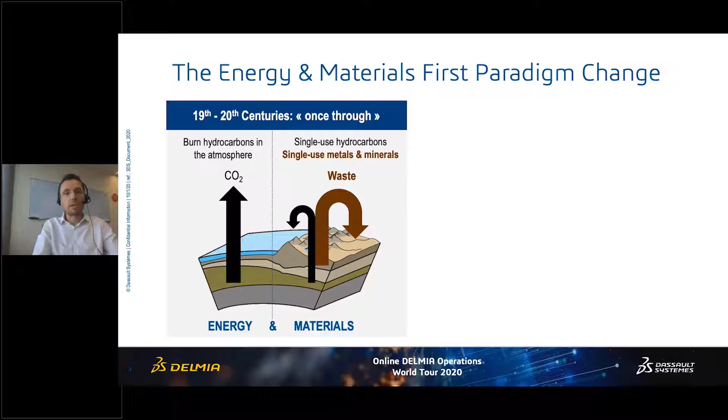And now we are heading towards something radically different, which means that decarbonization of the energy sector will rely on energy conversion devices that are manufactured primarily out of metals and minerals, which means that during this transition, decarbonizing the energy sector, we'll have to build more and more of those energy conversion devices, be it wind turbines, solar panels, nuclear power plants, or hydropower equipment and dams.

So this means that during a transition, which will last for this century, there will be an increasing need for metals and minerals just for the purpose of creating those energy generation devices. And on top of that, there is the continued demand of metals and minerals for the usage that was already existing. In order for this to become sustainable, we have to make sure that all this extraction of metals and minerals is not once through, but really becomes circular. So that's the major paradigm change.

Of course, within this circularity, there will be some losses, both for hydrocarbons and for metals and minerals, and we'll need to top this up with extraction, which will become minimal. So what does that mean for the metals industry? It means that the metals industry is going to transform towards a circular industry. That is a very important point.

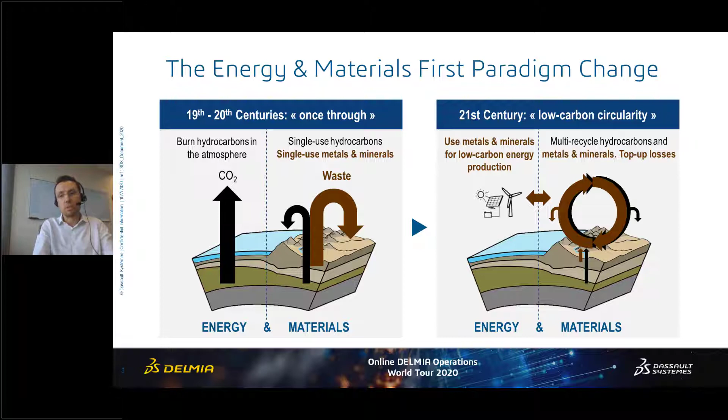The second paradigm change is that we've been in a commodity industry in energy and materials over the 19th and 20th century, and this is changing, and the industry is moving into productization. Productization of the end product, moving from bulk to specialty product, and also productization of the production infrastructure, moving from one-of-a-kind mega projects into replicable modular projects. That is another very important change.

So overall, what does that mean? We understand that there will be a very strong demand for metals, be it due to the continued growth of the population, continued growth of the world's average GDP. But beyond this continued strong demand, there will be a growth in scrap availability, scrap metal, many different types of metals, and I will go through some examples. And this means that this scrap metal availability, which is primarily going to be obsolete scrap, is going to start to fuel this circularity loop.

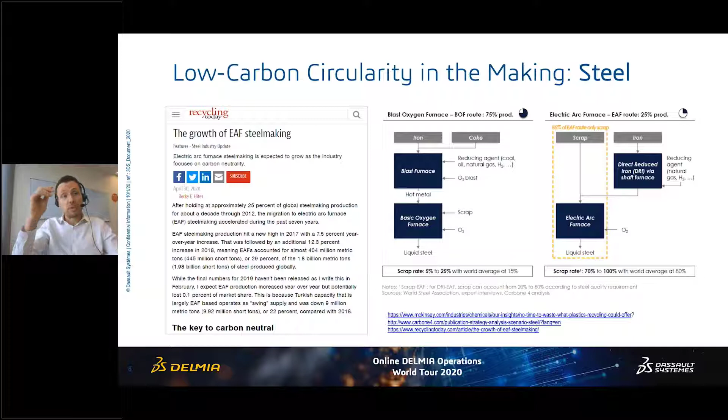In the steel industry, for example, there is a very strong growth in electric arc furnace steelmaking, which has very strong environmental advantages. And this is developing extremely quickly, in particular in Asia.

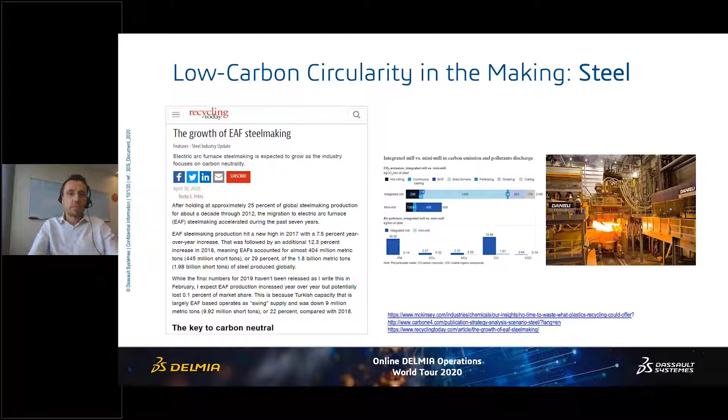Beyond traditional metallurgy, we also have the new kinds of metals, energy metals in particular. Lithium is an example. Everyone talks about lithium today. Everyone wonders about how sustainable lithium extraction and processing will be. Today, already, lithium circularity starts to be organized. There's a number of companies in the chemical and metallurgical world that are going in the direction of lithium recycling.

Why so? Very simply, because it's more economical to recycle lithium, particularly when it comes from electric vehicle batteries, because it is very much concentrated. Indeed, recycling metals from an electric vehicle battery is much easier than recycling them from smartwatch batteries. It's much more concentrated, and this is why major producers of electric vehicle batteries are today setting up their own lithium and other metals recycling plants.

And one of the high-profile announcements from Tesla is that they are commissioning their first recycling line in the Tesla Gigafactory. So not only do they produce new batteries from new materials, but they also start the circularity loop. This is very important because this is going to impact even more the manufacturing world.

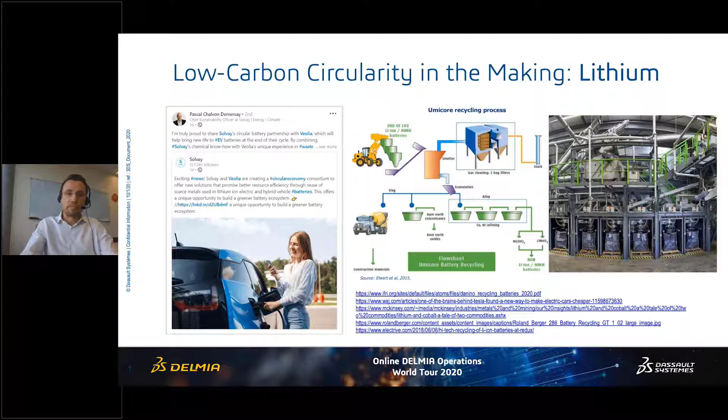So one of the first points to make sure that the metals industry goes towards better circularity is first better sourcing. Indeed, it is extremely important to ensure that there is traceability of the feedstock of whatever reaches the plants, and this becomes a reality today. A number of companies are positioning themselves in the field of end-to-end traceability. So traceability of raw materials, traceability of the processes that are used to transform them and to bring them to the metallurgical plant. So there has been a number of news recently around this.

And what is extremely important related to this topic is that it's not the topic of one specialist doing something specialized at one stage of the life cycle of the metals. It's really an end-to-end process that brings a number of different disciplines together. And this is really a topic where platforms can play a very important role. So here, I think this very first step is a critical one.

Beyond sourcing, which somehow is inbound, there are several other options that we have to discuss, and many of them are available today. So these options basically revolve around designing better products and also better processes. As I mentioned earlier, products are likely to become more and more specialty products, and we are moving away from bulk production only. And moving away from bulk production means that production companies can better control their sales prices and therefore their margins. Okay, it's really gaining more control over the top line and not only on the bottom line, which is typically the case with bulk commodities production.

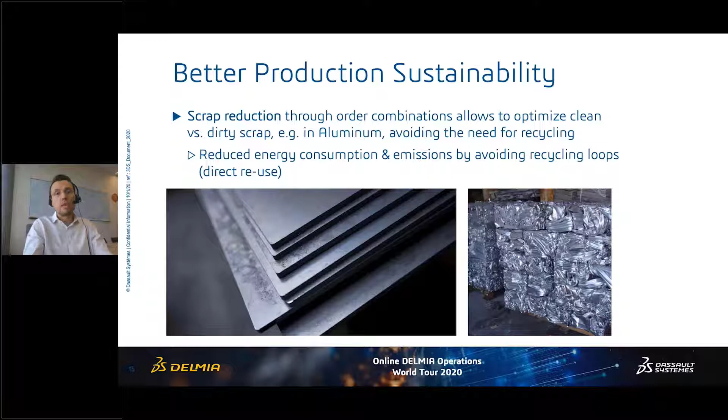Another important point related to sustainability is to optimize the scrap reduction. This can be done typically through a better order combination, and ideally separating clean scrap from dirty one. For example, in the aluminium industry, this means that the clean scrap does not need to be recycled and can be put back in the process directly, which results in reduced energy consumption and emissions and avoids complex recycling loops. So again, direct reuse and scrap reductions through order combinations is a very powerful instrument in order to improve the sustainability of the production process.

Going to another example in the steel industry, for those plants that combine steel making and rolling, there is a very powerful option which is related to hot charging, where basically we optimize the combination of the different production sequences to ensure that what comes out of the steel making process is not left to cool down, does not need any reheating, and goes directly into rolling.

So this is an extremely sophisticated planning puzzle beyond what's available inbound, beyond what's requested by customers and the availability of the different steel making and rolling lines. However, being able to optimize the hot charging has a tremendous impact in terms of energy consumption, and avoiding reheating is a major source of economy also in terms of production.

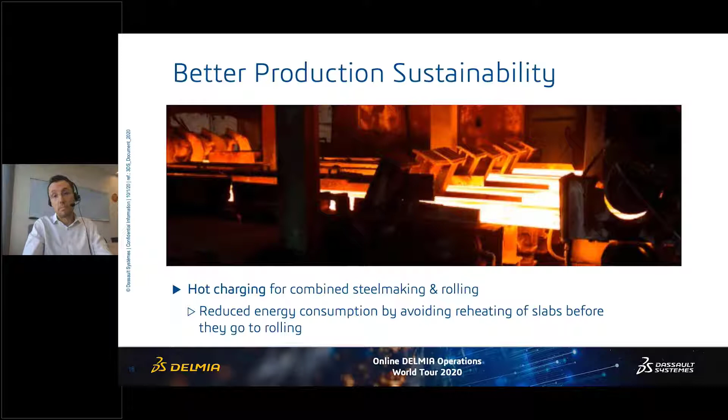Finally, extremely downstream in the production process, there is another option to optimize the overall sustainability of the production process. It's to optimize the logistics. That may sound obvious, however, it is again an extremely powerful tool, especially now that end customers are measuring the end-to-end life cycle footprint of the materials they are consuming. They will take into account also the logistics part of it. So optimizing logistics, of course, reduces emissions and also optimizes the fleet or infrastructure usage.

So optimizing the fleet means with the same number of trucks delivering an increased amount of material, or in case of rail freight, it can mean using single track dispatch system. We've seen in the past some of our customers who had saturated their train track and were considering financing the construction of a second track. And by just going into extremely deep optimization of the train schedule, it's been possible to almost double the outbound logistics without the need for building such a second track.

So again, the same applies for sea freight, etc. And what is important, again, is that all of these downstream emissions are now taken into account to calculate the footprint of the products delivered to the end customer. So again, a number of options available today: blending optimization, scrap reduction, hot charging, and logistics optimization.

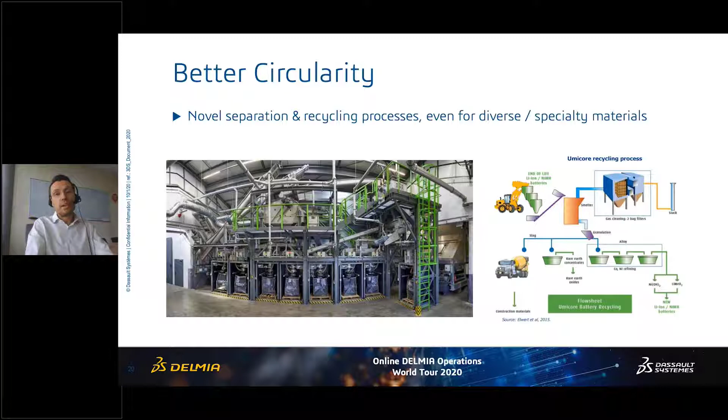Beyond this design or redesign of the materials and the separation processes and the recycling processes, there is the need to organize, optimize, and execute the circularity loops. Effectively, that means collecting waste, scrap, wherever it is, in efficient manners. So again, this is a very complex planning puzzle, and it calls for broad optimization at multiple levels to optimize the footprint of the collection itself. So that's another logistics puzzle. Generally, we've been thinking for many years about logistics puzzles as one way from inbound to outbound.

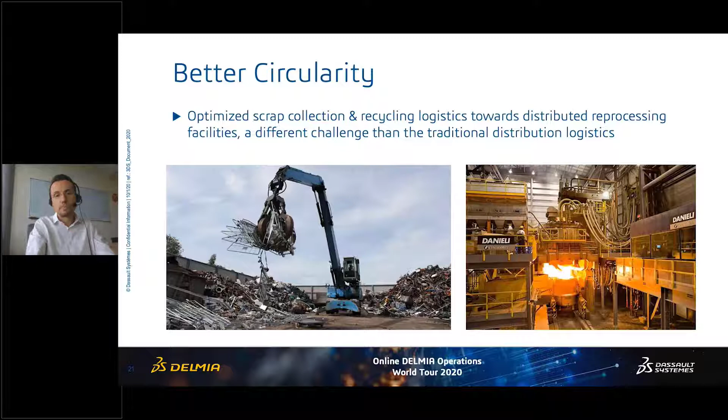Now these are circularity logistics puzzles, and as the recycling capability becomes more granular, it is important to organize those collection and circularity loops at a very granular level. So for example, small scale electric arc furnaces are booming everywhere, but they are small scale, and this means having very fine granularity in terms of optimizing the collection of waste metal in the close vicinity. So that's for the better circularity.

And finally, we have other options to go beyond in terms of sustainable metallurgy. Of course, this is downstream in the value chain, but at the design stage, designing for circularity and design for recyclability, design for lightweight and optimized materials usage is an important topic. So there is a key metric which becomes more and more important today around the end product use. It's called the MIPS, material input per unit of service.

When you take a look at two end products that deliver the same service, over the last few years, it's become common to look at the product that consumes less energy. More and more, it will become important to look at the product that uses less materials for the same service. So this is a challenge at the design stage. However, that can be helped by better designed types of alloys to ensure a minimized material usage. But again, if this is a specialized type of alloy, it has to be designed with the idea that this alloy needs to be multi-recycled and therefore broken down into its elementary components. So that's at the design stage, designing for circularity to reduce the material input per unit of service.

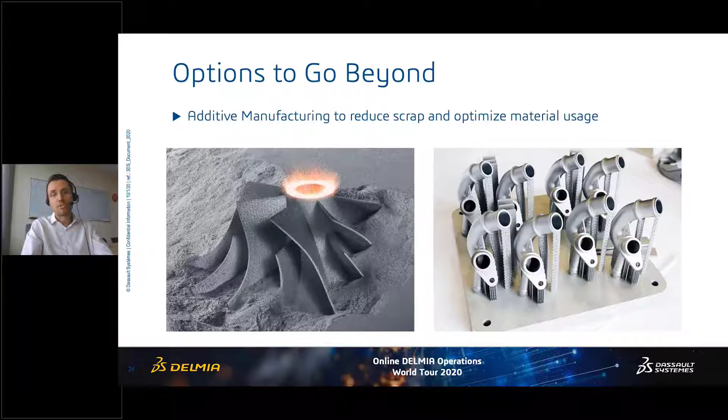Thank you, Thomas, for your useful insights about the industry vision and strategy. The key takeaway from your session is definitely on sustainability.

Thank you, Thomas. Now, in this session, let's take a look at Dassault Systèmes 3D Experience Platform value to support operations excellence in metal industry for the digital transformation journey. I'll be joined by my colleague, Koert Munnich, who will also be sharing his experience in working with metal industry in planning and optimization domain.

Before we deep dive into our solution experiences, let's briefly look at the business scenario in these strange times of disruptions. These are the top 5 trends happening during this disruption today, which are increasing operational flexibility, ensuring employee safety and security, either working remotely or working under safe conditions.

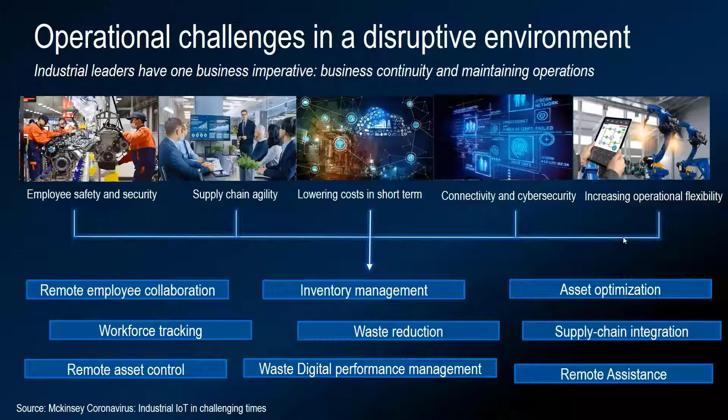And due to remote working or remote asset management, connectivity and cybersecurity is an important trend, along with resilient supply chain due to onshoring or nearshoring of manufacturing to reduce risk on critical supplies, and definitely lowering costs to stay viable in the business. Even the McKinsey report also talks about these emerging trends to support business continuity.

Let's see what are the emerging digital transformation opportunities for metal industry to bring in flexibility, agility, and resiliency to their operations. The digital metal company is on a journey of big data, advanced analytics, and OPEX and CAPEX activities, which is data-driven raw material analytics to optimize feedstock cost, digital procurement strategies, and end-to-end supply chain integration, like production data sharing with suppliers, real-time supply tracking, predictive maintenance, advanced analytics-based predictive and risk-based maintenance across all aggregates,

digital manufacturing, which is production automation, some examples like autonomous cranes for coil handling, robotics and automation, heavily contributing to total productivity improvement, digital integrated lean system like lean management to drive manufacturing excellence, and industry 4.0, which is like an industry renaissance, where automation is finding more widespread application both in production as well as in support functions. Let's see how these digital transformation trends can be achieved through 3D Experience platform.

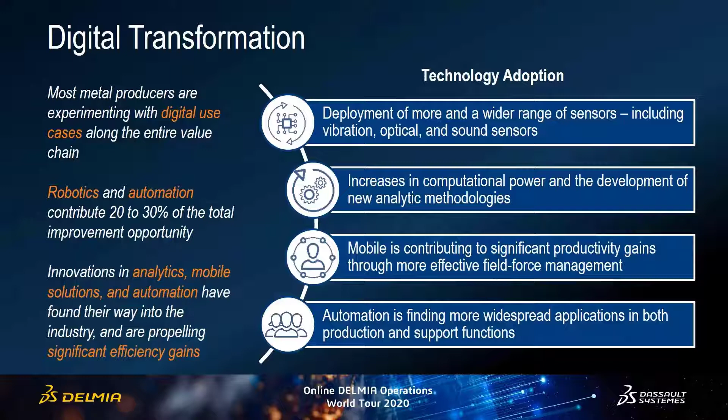Let's see how 3D Experience platform supports these emerging trends and also opportunities for digital transformation through industry solution experience strategy. Based on our experience around the smart factory approach, we propose a solution around 10 steps to support operations excellence. These 10 steps are part of the virtual twin experience strategy of collaborate, model, optimize, and perform, and these four are a foundation stone for the virtual twin experience strategy. Let's see in detail each of these steps to support various business processes.

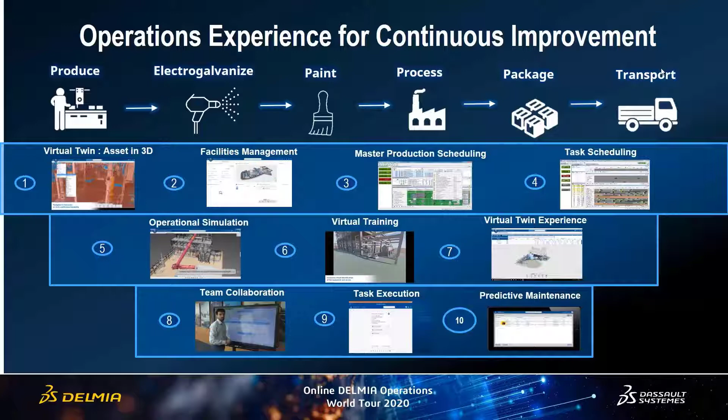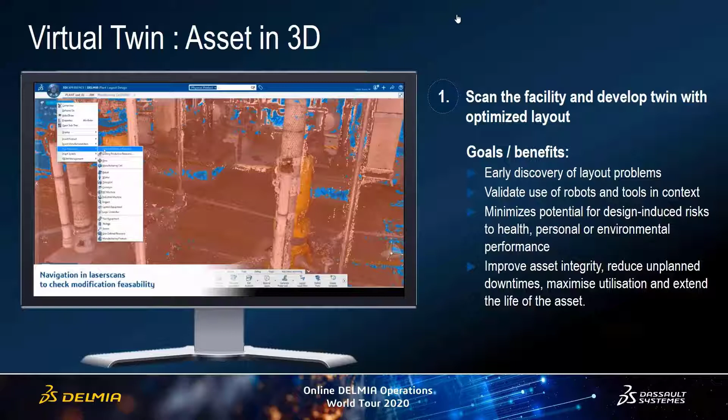One of the important aspects to note is that most companies don't have the option of starting with greenfield factories and 3D digital renderings from an architectural firm. But this is a very solvable situation, as the 3D Experience platform has the right tools necessary to build up the factory from any available 2D documentation.

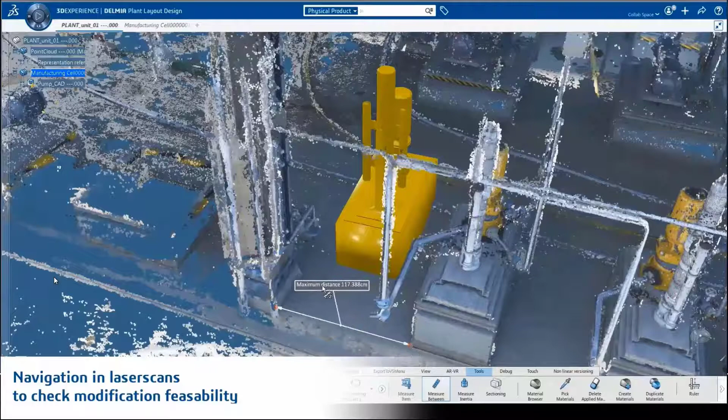Or in this example, what you're seeing here, Dassault Systèmes partners with key technologies like mobile scanning, which can scan the complete facility and bring in a cloud of points. We can then convert this cloud of points into a 3D layout inside the 3D Experience platform. This is the beginning of creating a virtual asset in 3D. The virtual twin can be used for downstream operational excellence activities.

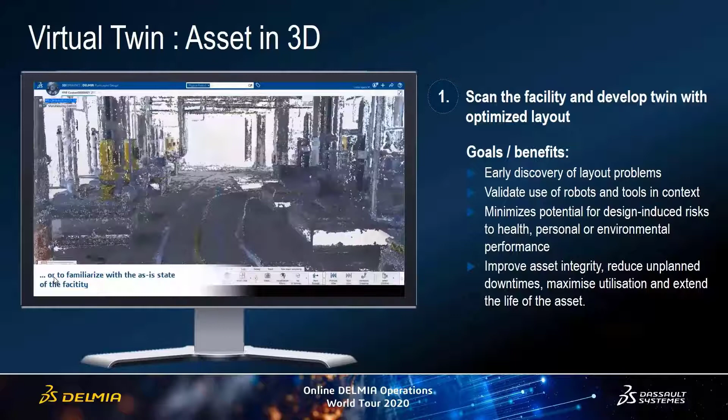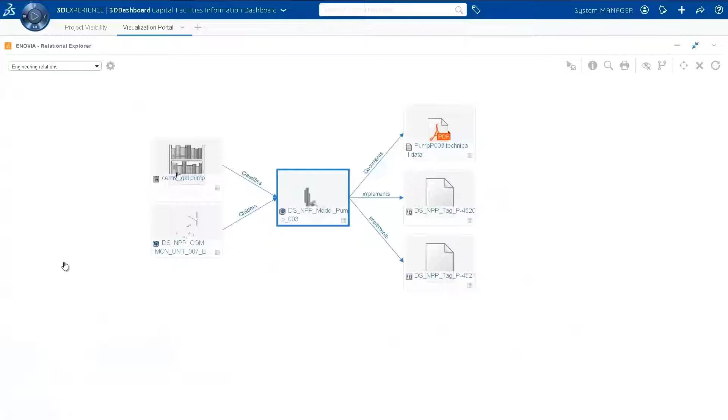With the 3D virtual data, or virtual twin, available now, one can create capital facilities management using 3D Experience platform. What you're seeing here, various asset repositories can be created, and documents, historical maintenance information, and P&ID diagrams can be attached to this particular equipment for effective asset management.

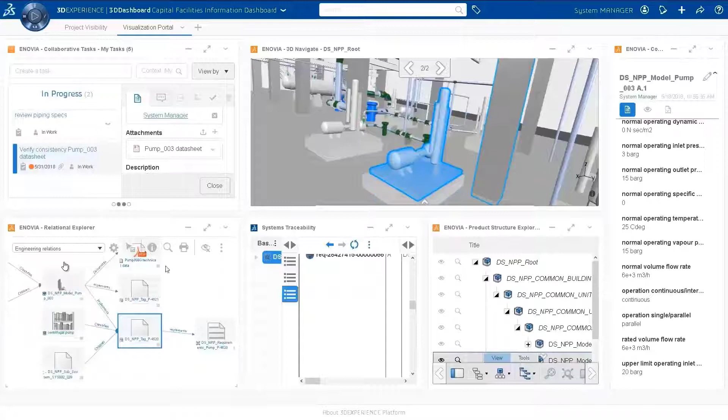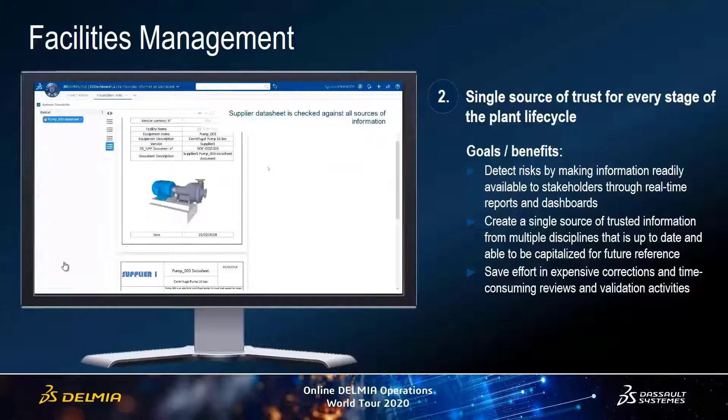3D Experience platform provides a single source of truth for every stage of plant lifecycle and equipment management, right from early design, engineering, production, maintenance, and even operation. Knowledge is accessible across the various teams so that proper collaboration for effective production and maintenance management can happen using 3D Experience platform. With the virtual twin data and collaboration management infrastructure in place, let's now see in detail the activities of plant operation.

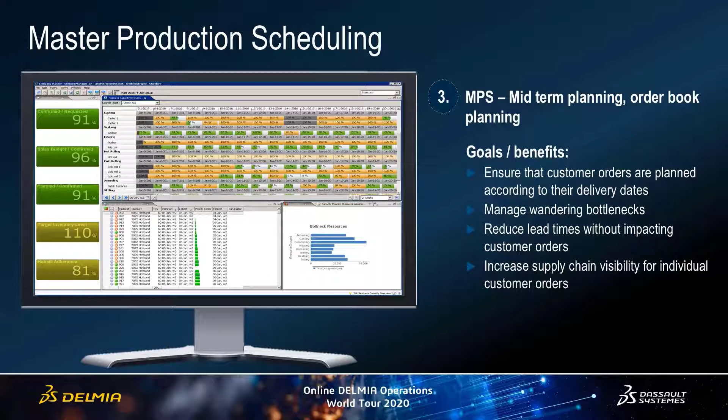So let's have a look at how it does that. The solution is high on optimization and consists of various building blocks that work together. It can be used to rebuild the whole plan anew every day and re-evaluate what is best for every order and every material that it knows. The planner that uses the system typically only makes changes in exceptional cases.

The building blocks are sales plan check. Sales plan check takes care that orders are not planned as first come first served, but according to the agreed sales plan. Low added value orders should not be allowed to take capacity away from high added value orders without explicit planner decisions. Next to that, there is a combination of capacity planning, material replenishment, and material reservation, including make or buy decisions. And these 3 components are being used in one combined optimization run. And this is taking optimization with the use of KPIs and makes a plan.

The MPS solution also supports order promising during the day, every night, whatever is possible. And what it does is it uses the same optimizers to validate if new orders can be accepted, checking the capacity, checking the material, and also checking the sales plan. And at any time, there is full visibility of the plan. So the planner can analyze the resource capacity, the material plan, and also how orders are planned over the whole supply chain in the system. So until now, that's it for the MPS part.

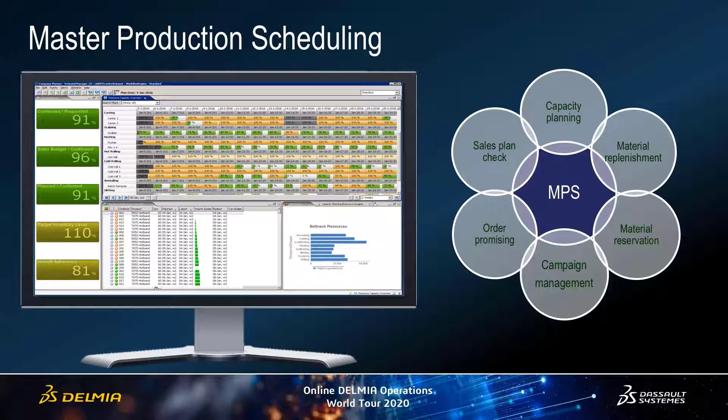Let's move from midterm planning to short-term scheduling. At the scheduling level, individual work orders and work order steps are assigned in a sequence to a resource, where the midterm planning worked as just in time, starting as late as possible. The scheduling solution will try to utilize the resource capacity as soon as possible, minimizing the idle times and gaps in the capacity. The goals and benefits of the detailed scheduling are to ensure that all orders are produced on time by making sure that all the operations are scheduled according to their due dates.

It optimizes the task and work order assignments to maximize the utilization and the efficiency. It gives your planners the real-time insight to make sure that they can resolve their day of operations disruptions. The scheduler will also decrease waste by assigning the right materials to the right orders, minimizing scrap. And finally, it will decrease the work in progress by scheduling multiple steps ahead, using virtual materials.

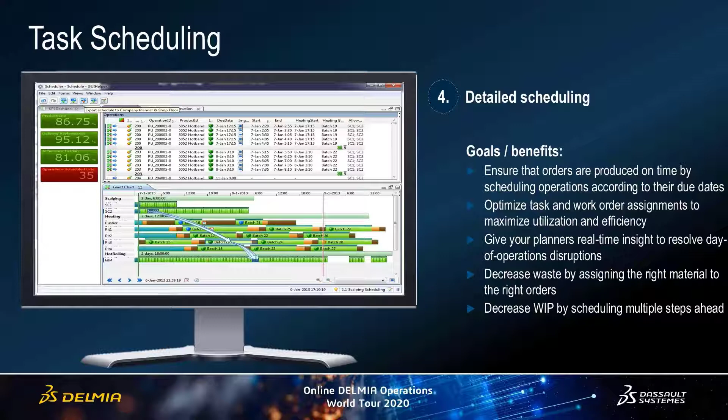So let's also have a look at the details of that. The scheduling solution has the following building blocks. Resource sequencing, including sequencing of steps ahead with virtual materials, as mentioned before. Material reservation, which can also take into account relaxing criteria, allowing, for instance, overqualified material to be used, or even making sure that characteristics-based material reservation is done. It allows for batch creation and sequencing of the batches.

For instance, for heat treatment furnaces, it allows campaign scheduling, and the optimization is supporting the planner, but the planner stays in control. He can always directly react on ad hoc incidents or events. And when he does that, he will see in a real-time overview what happened and what is about to happen, allowing for manual intervention. And the consequences of all the actions of the planner and also the optimizer are immediately reflected in the KPIs, allowing the planner to see the quality of the actions in the bigger picture of the full schedule.

This concludes a high-level overview of the planning and scheduling. And now back to you, Prashanth, for the next item.

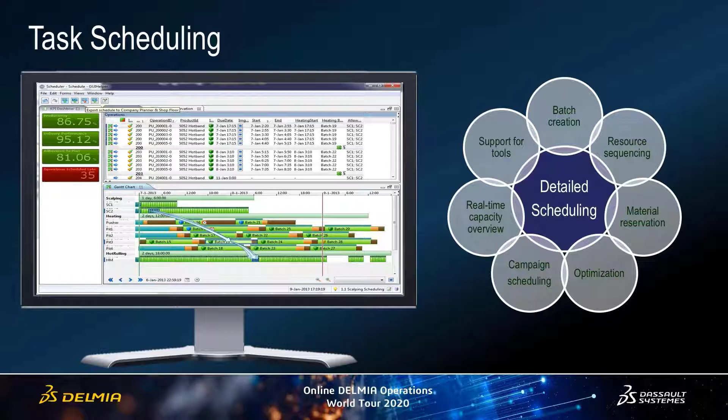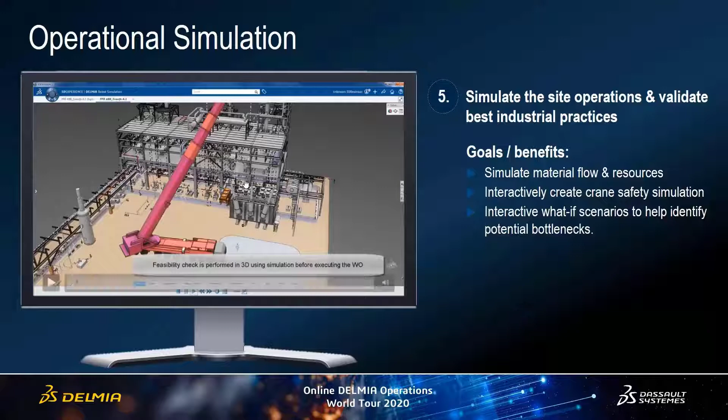Okay. Now with the virtual twin data as well as scheduling information available, we can leverage 3D Experience platform to simulate various factory processes. In this example, we are simulating the factory operations and validating the best industrial practices for crane operations here. We leverage 4D, which is 3D plus time, to optimally use resources like crane and ensure safety of maintenance operations, avoid collisions, and validate minimum distance for smooth operations.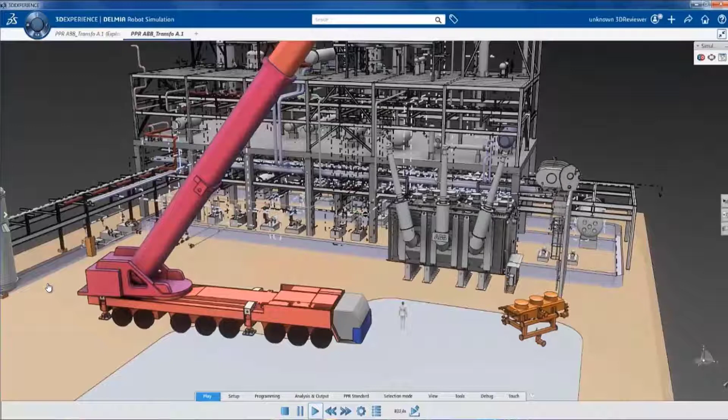The idea of simulation here is to establish material flow or resource sequences, interactively create crane safety simulation, what-if scenarios to help identify potential bottlenecks.

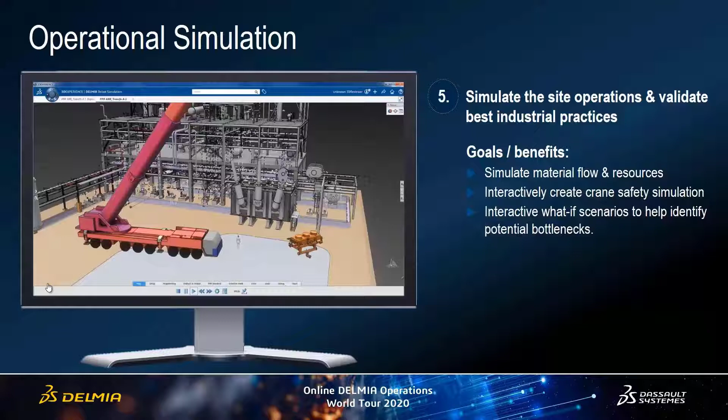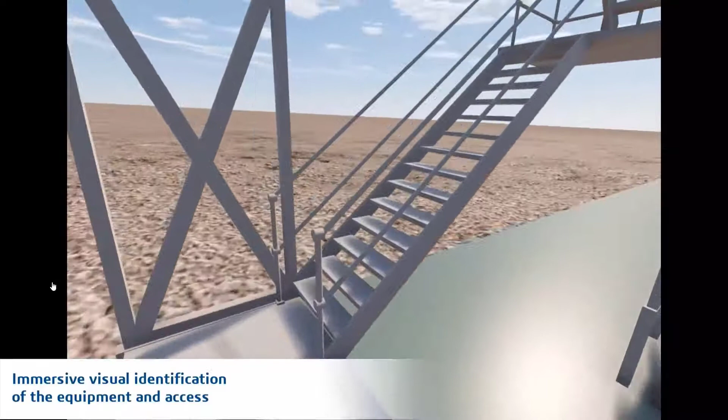We have the plant virtual twin model. We can leverage virtual reality and in some cases even augmented reality models to train the operators with standard operating procedure for safety. This is a natural extension of the plant virtual twin model for operators training, which can help in eliminating risk and safety concerns, reducing training budget and providing scalability, repository of training knowledge, and validate worker interactions within the work site to help to improve productivity.

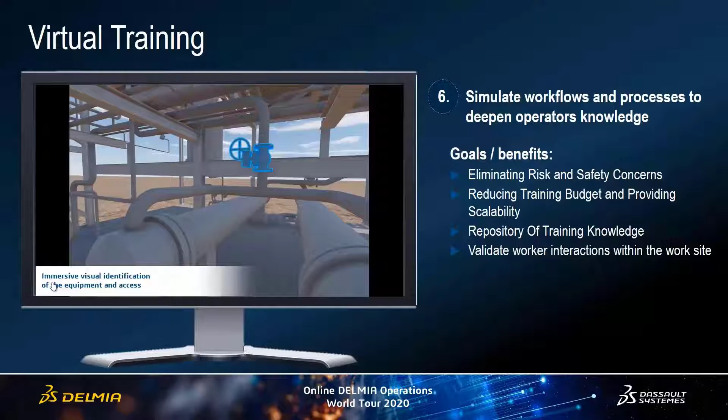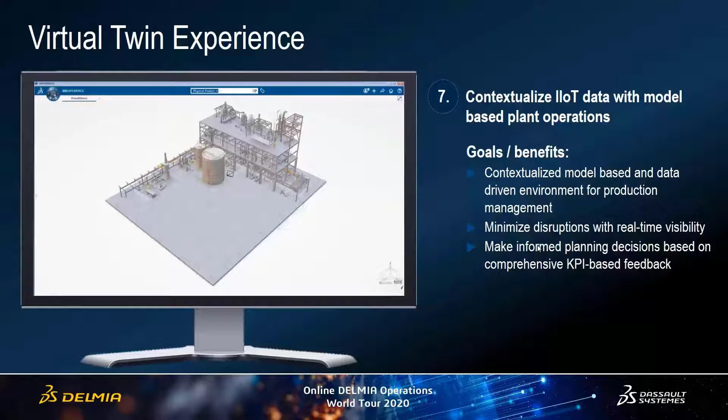Now let's see an important aspect of IIoT in plant operations. This is where 3D Experience platform is a key differentiator in contextualizing IoT data with the model-based world. Using the operations experience, we can contextualize model-based and data-driven so that you can achieve virtual twin experience on 3D Experience platform. Let me run a simple example here.

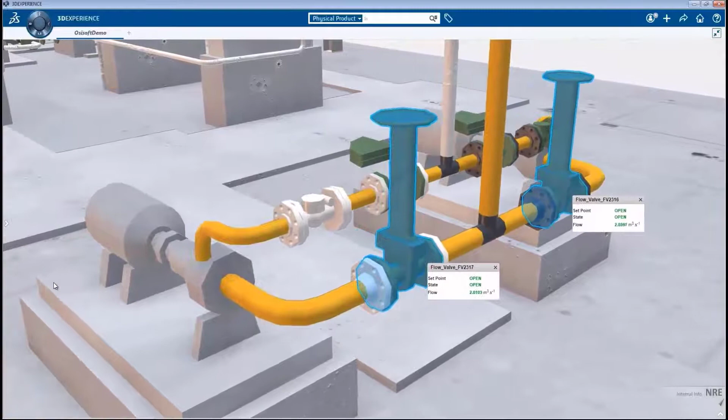Steel plant operators or any owner operators will get access remotely to a replica of an asset in 3D representation and also showing real-time data from sensors. You can see the real-time data coming from sensors using standard OPC protocols. This is the virtual twin experience I spoke about, which is nothing but monitoring the asset performance live.

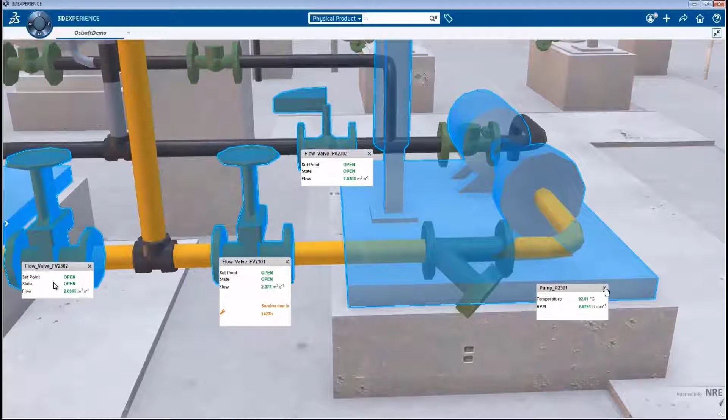It's not only the monitoring, but you're also validating who's going to execute the work orders, which field resources and various operators, what asset has to be maintained and repaired based on the sensor data directly coming into the virtual world. Obviously, plant breakdown structure and bill of materials are closely associated with these actions.

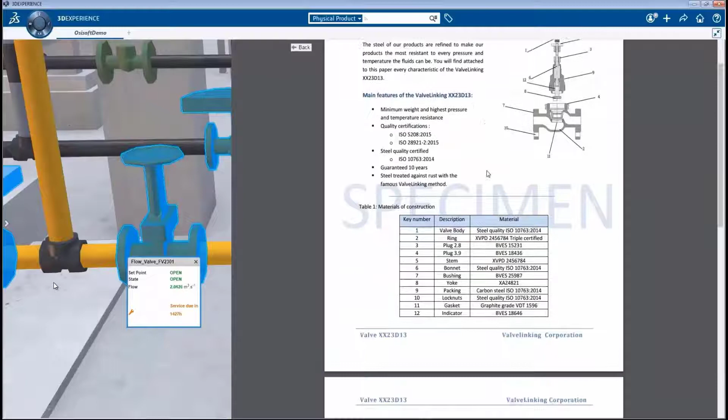You can also see how to execute the work orders, where the assets are located in which plant and which unit, and what documents are needed to maintain and manage these assets, and when shall the work order be executed. So all of these actions are happening on 3D Experience platform, which is a unified environment supporting the business processes.

Even the remote teams can operate and help the on-site teams in safe conditions and in an efficient manner. And what you're seeing here is the data directly being read from sensors and stored in a PI system for subsequent asset management activities. Okay.

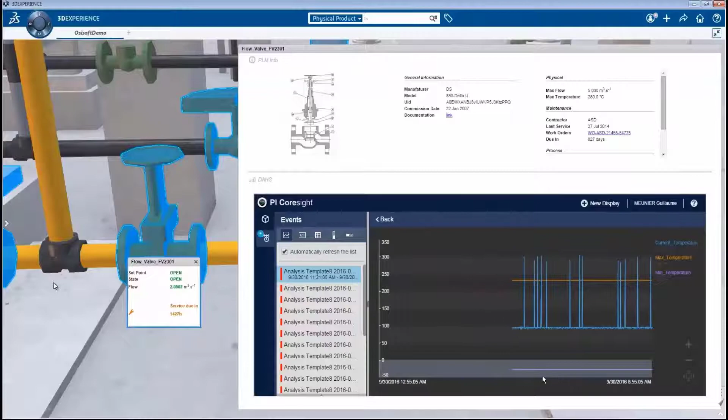Effective collaboration is an all-important activity for metal industry to achieve operational excellence. This is where lean operational management techniques based on simple user experience using touch panel screens comes in handy for organizational collaboration. You can manage shop floor meetings through lean collaboration techniques, capture and share knowledge, and one can take swift actions to overcome both plant as well as shop floor problems.

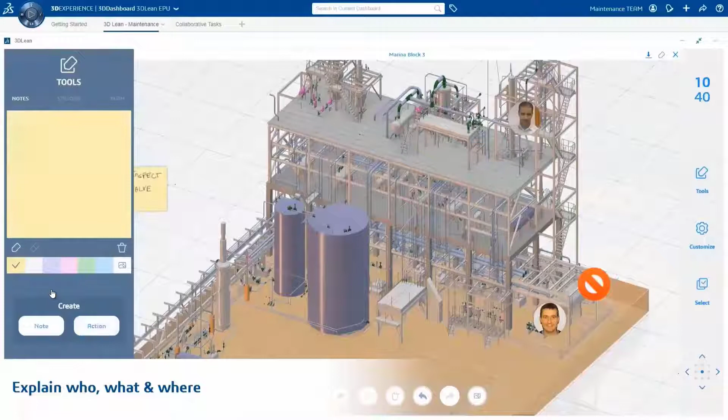You can assign tasks to various team members. So it's an intuitive and easy way to assign tasks. And you can also track the progress of these assigned tasks thanks to lean operational management, which is gaining momentum in various industry sectors. And we would strongly recommend or propose this technology for metal industry for shop floor operations for effective collaboration.

The idea of lean operational management is to empower teams for their operational meetings, enable cross-functional teams to easily collaborate and drive continuous improvement, and you can exchange and share ideas and information seamlessly across multiple teams.

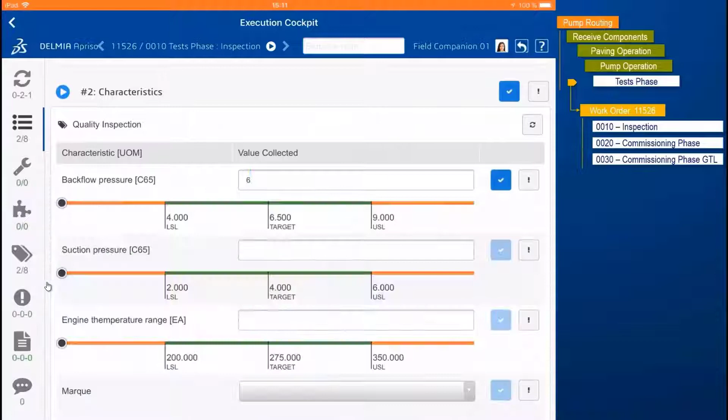With the lean collaboration infrastructure in place, we can see how manufacturing operations management, which is more than MES, manufacturing execution system, can be used for effective production management in metals industry. Using manufacturing operations management, you can effectively execute, track and trace offline orders, even in remote or wireless environments. One can achieve improved operational visibility, thanks to dynamic dashboards for informed decisions on production, quality, maintenance, labor management.

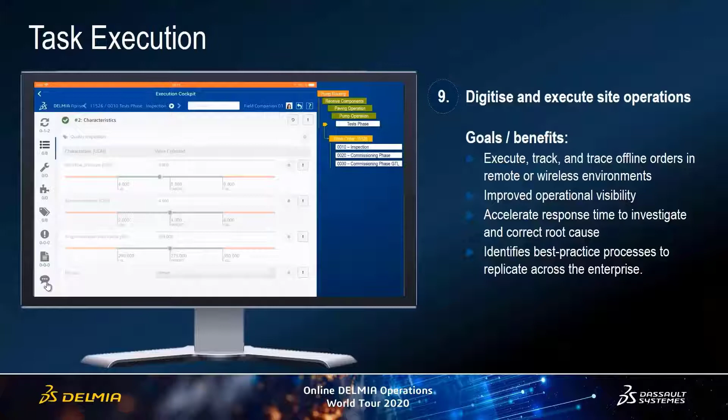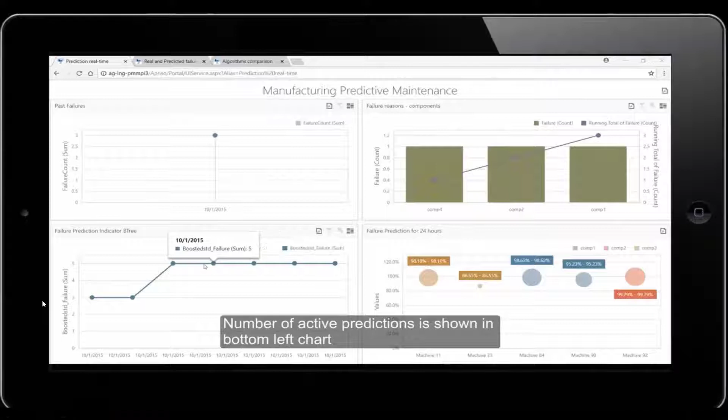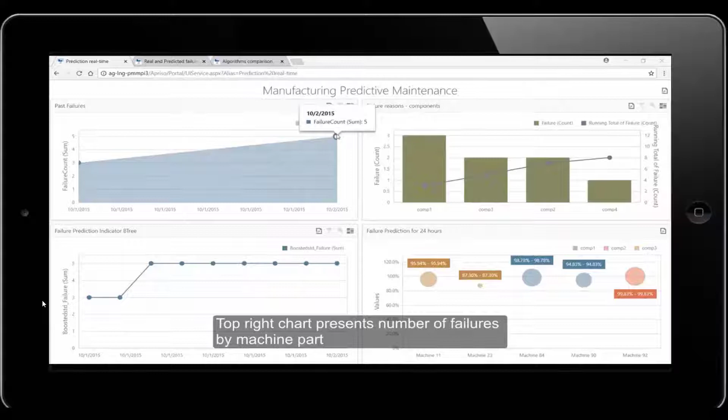Once the machine has been integrated to 3D Experience platform maintenance application, and through machine integrator, the data is collected from sensors on the machine, and the machine operating parameters are continuously captured via cellular wireless network into the company's data lake. We can use configured application on this data and predictive analytics. And in this case, we have used a boosting algorithm to predict the next action.

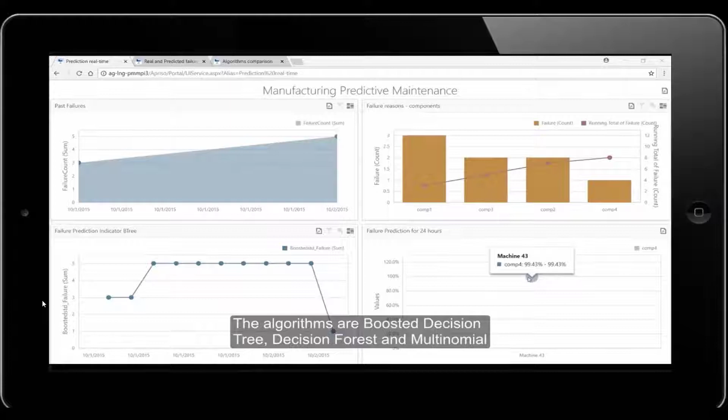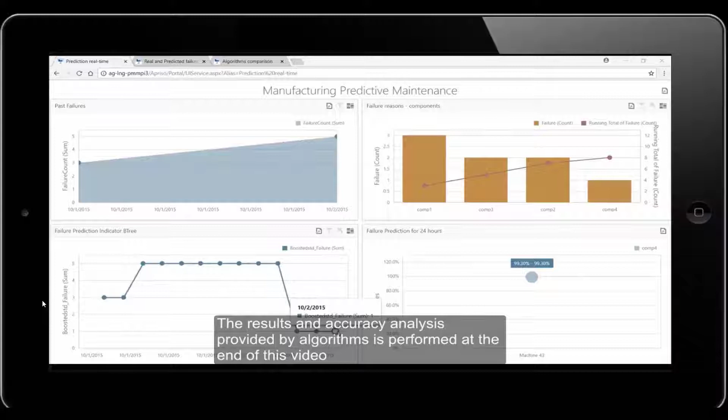With this prediction process, maintenance and production managers can schedule a total productive maintenance action. Total productive maintenance are nothing but TPM actions. When doing so, it will not slow the factory's manufacturing processes, keeping production on track. The goal of predictive maintenance is to reduce maintenance cost and reduce downtime for repairs, increase production, and improve operator safety.

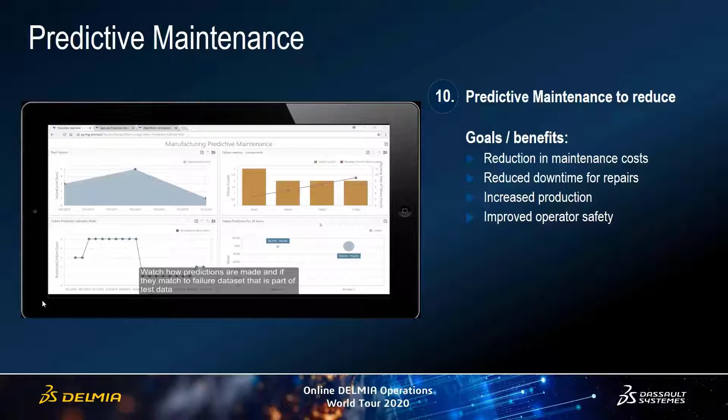Okay, with this, I would request Koert, my colleague, to walk you through some of the return on investment, and some customer action. Koert, over to you, please.

So where do we see most return on investment with our customers? First of all, in on-time delivery, where we regularly see two-digit improvements. Proper and well-integrated planning and execution will have a big impact on the OTIF, especially in the metals industry.

Secondly, reduced inventory. It will give a one-time value for the metal, but it also has positive side effects, like the reduction of costs in storage capacity and more efficient material allocation, etc., which are recurring savings. Also, other costs can be reduced, such as waste or scrap, penalties for delays, for inbound logistics, but also for final delivery, and those can add up to from 5 to 20% in cost savings.

And finally, reducing setup times and idle times will increase productivity. And there we see a typical percentage improvement of 3 to 5%. These numbers that you see are based on our experiences in the metals market. And of course, certain customers gain more in one area, others in another.

Every business operation has its planning puzzles. And DELMIA solves these planning puzzles and tries to optimize every operation for better performance and higher profitability. And it does so taking into account the full supply chain and all planning areas. Earlier we mentioned only a few, MPS and scheduling, but there are more. And our metals customers use different solutions.

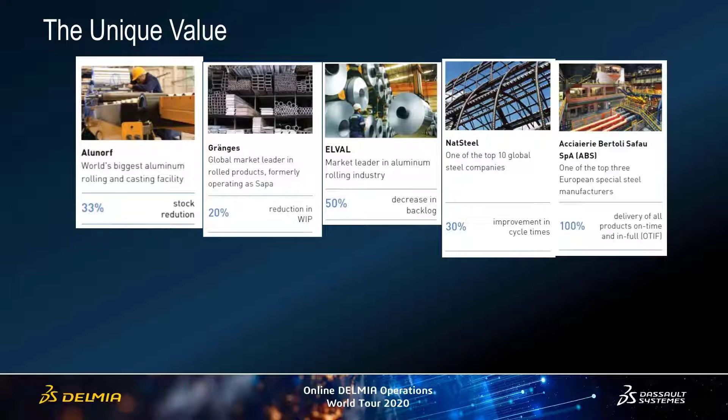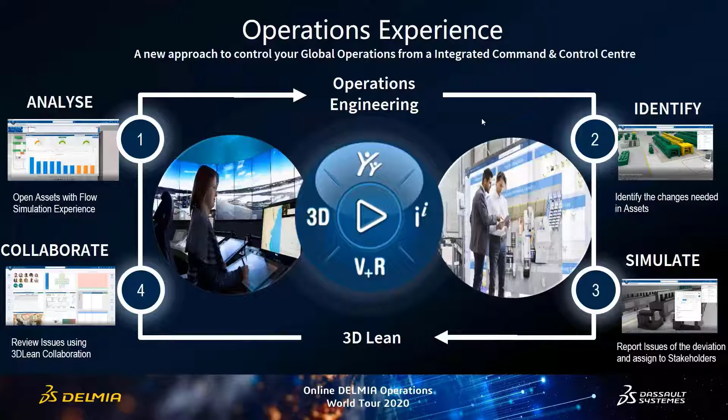With this, I'd like to reiterate the operations experience, which is a new approach to control global operations from integrated command and control centers, where the 3D Experience platform could be used to analyze overall equipment effectiveness of assets, identify the issues and then changes needed on those assets, and you can simulate and report issues of the deviation and assign it to stakeholders using those lean operations management techniques, which you have seen, which is an intuitive, touch panel enabled collaborative management tool, wherein design, production, quality, maintenance, all the stakeholders can seamlessly collaborate to achieve operations excellence.

So through various examples, you have seen how the 3D Experience platform can help to address some of these operational challenges in a disruptive environment. We believe the 3D Experience platform can be instrumental in ensuring business continuity, employee safety and security, manufacturing flexibility, and lowering short-term cost in any metal company.

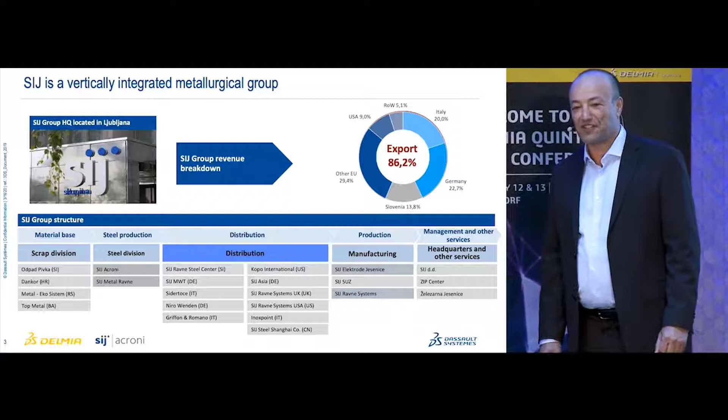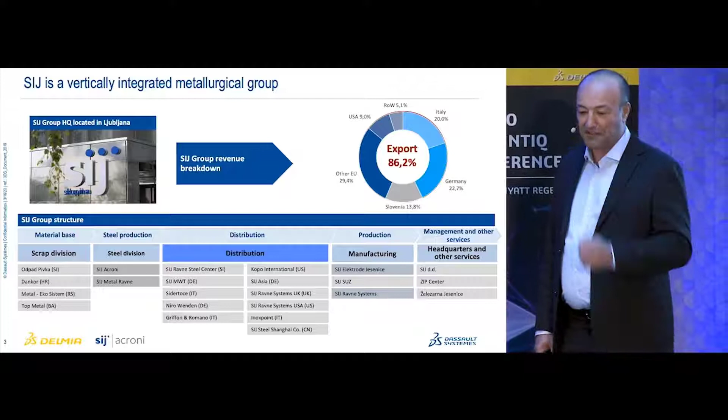So we are coming from Slovenian Steel Group. This is the largest Slovenian steel producer and one of the largest stainless and special steel producers in Europe. The company has 70% of its market inside the European Union. The rest is the domestic market, something in the United States and a part in other countries all over the world.

So the group is vertically organized. That means it covers all the processes from scrap collecting, over steel production, direct distribution, and also distribution over steel centers in Europe and also in the United States.

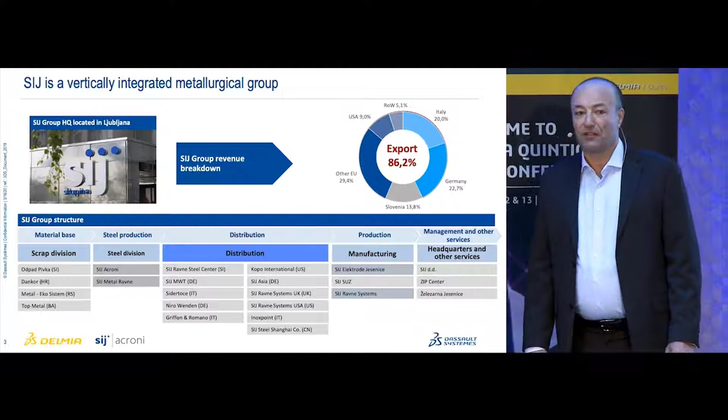There are two main steel producers in the group. One is Metal Ravne; they mainly produce special tool steel. The other is Acroni at the Jesenice location. We produce rolled flat products, mostly stainless quarto and special steel quarto plates.

So we are a niche producer. We have a big number of different products. So we were focused on continuous improvement of our position on the market, and we were aware that we need better support for planning decisions. That's why we started with the planning project.

The main goal of the project was to improve mid and short-term planning. Our planning process at that time was based on Excel sheets, and mostly on resource capacity levels. So we wanted to convert this to order-driven production.

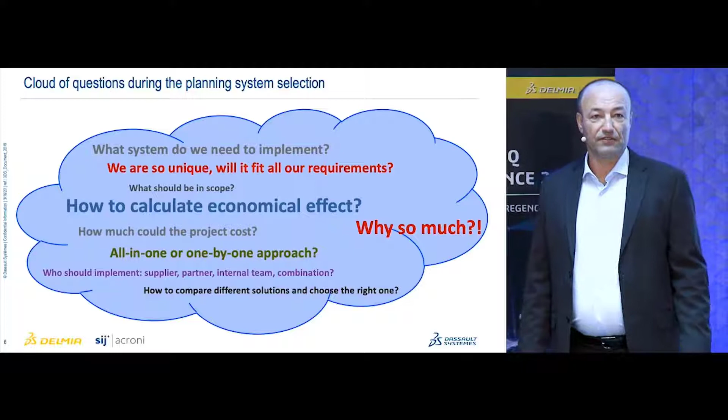When we tried to answer all these questions, it was clear that the DELMIA Quintiq Company Planner product was the proper choice for us. We were very confident when we checked the reference list and saw other world steel producers there. After checking the capabilities and features of the product, we were convinced we could satisfy the majority of our needs using the standard industry solution, and just a few customizations might be needed.

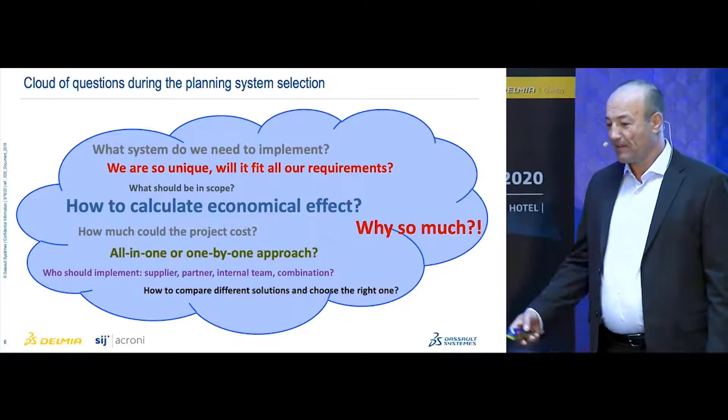Thank you. So what Zdravko was describing took about two years. Now the easy part came: the implementation took us only seven months. Coming from the PMO, one of the selection criteria, when we were dealing with five vendors, was how mature the project management methodology is, and how it maps to our internal project management methodology based on PMI.

It turned out that Quintiq has a very well developed project management methodology. They also introduced the Express QPLC. The difference from the normal QPLC is that we had to be much faster, meaning the honeymoon period ended sooner.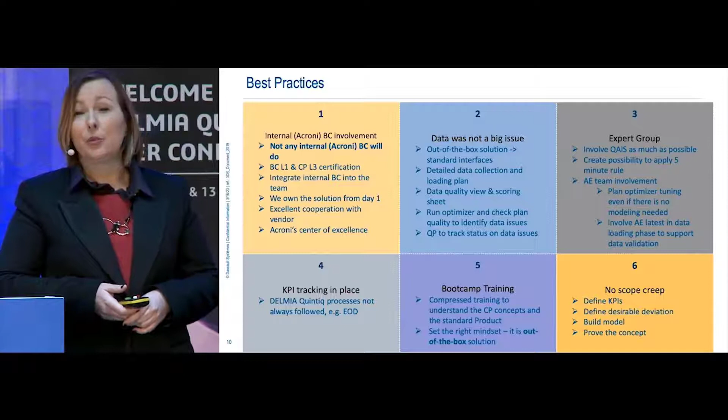Organizational change management is a process that is part of our every IT project. Now you probably understand that this was a very successful project that we delivered last year, and the best practices were incorporated also in our project management methodology. So we are taking this positive experience from implementing such a complex project into everyday life.

So number one, I'm going to refer to the experience that we have with Company Planner, is internal resources, you're always probably struggling with what is better. Our suggestion is that internal resources with the knowledge of the solution are absolutely necessary if you want to, number one, maintain the level of usage on the required level, and of course to develop further and to improve the processes vertically or horizontally.

Maybe one thing, so develop your internal resources. Zdravko and the colleague Alex got certified. Believe me, Quintiq does not give those certificates away easily. So this is quite a difficult experience also for the best people. We appreciated that. So we saw that Quintiq is serious about what it means to be certified in the Quintiq world.

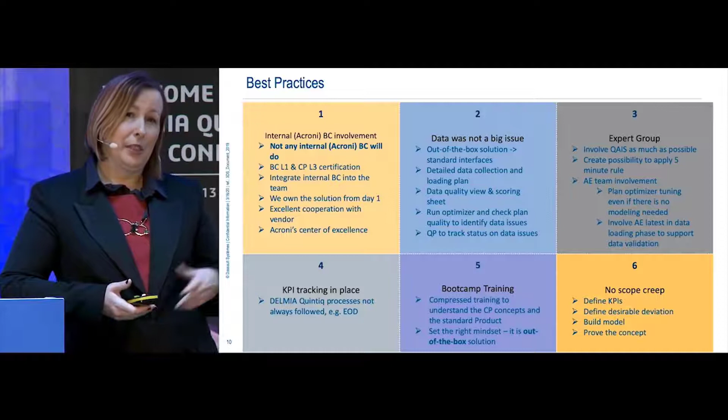So the second thing, not anybody can be a resource for Quintiq because of the complexity, because it requires people with extended business process knowledge. I think this is even more important than maybe the technical knowledge. We had a partner that was very technically capable but did not have business process knowledge, and this is why we had to replace these resources with our internal ones.

Regarding the expert group, we also chose Quintiq because it was a very long pre-sales process. They also made sure that we got the best team from their side. It was very good, honest, open communication. Of course, every project has issues. We overcame those obstacles and issues in a very professional manner. So it was on a very high level of respect and understanding that we are in the same boat. We have the same goal, and this is the only way to go.

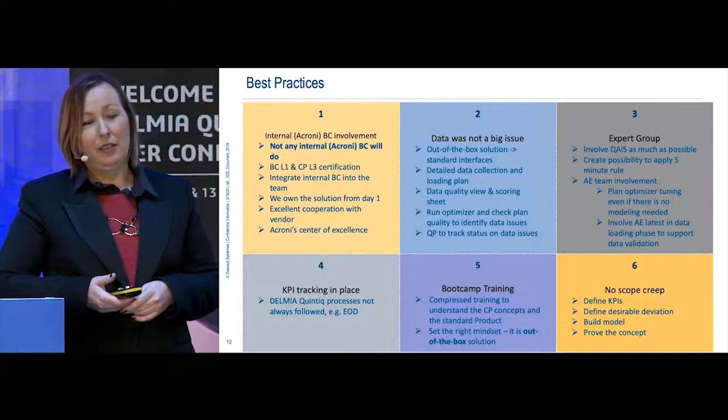Regarding the project management methodology, Quintiq people were also very flexible. They gave us enough flexibility, so we found the right balance, and this is why we also think that the success was possible. And as I said, we did not allow any scope creep. Of course, there are always ideas when people see, the imagination kicks in, and everybody wants to have more.

So the project management and the core project team had to make sure that we stayed focused, that we understood what the goals are, and did not allow a lot of stories and additional requirements to kick in, unless they were well thought through or argued.

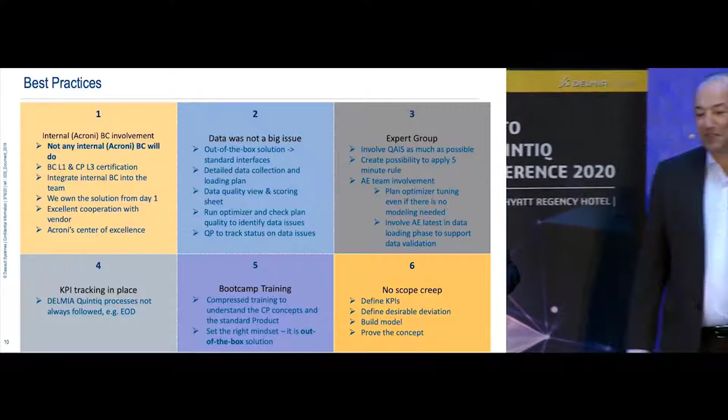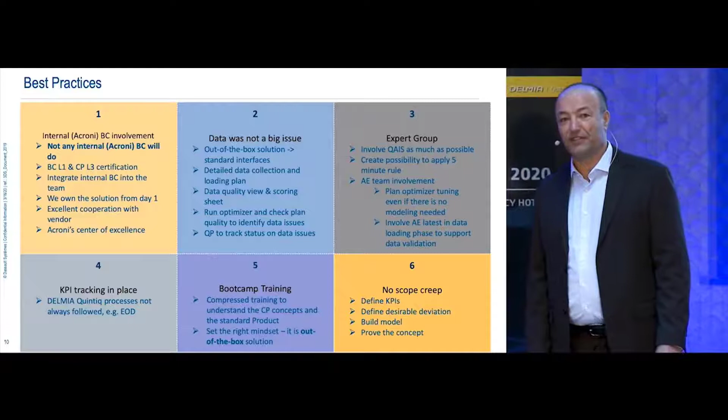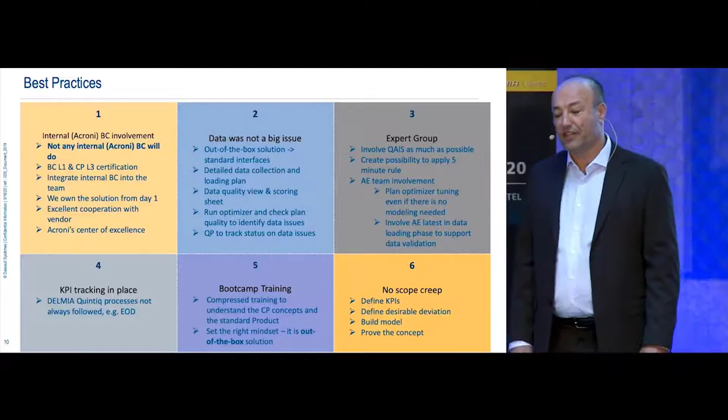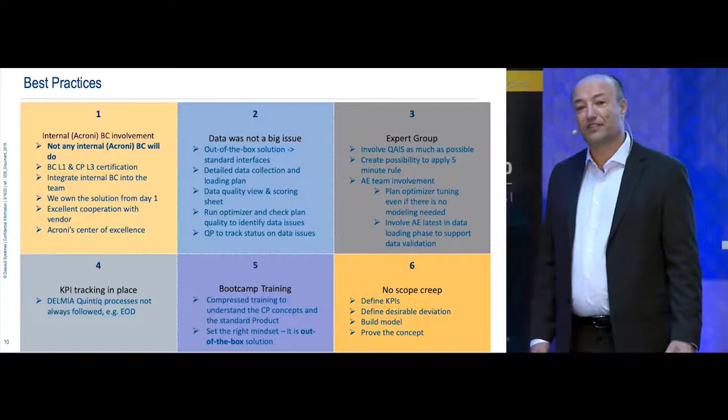A few words about data. Data was really not a big issue because we had a strong internal team who prepared the collection and loading plan, and we used the standard interface, database to database, and we also used features inside the company planner, like the data quality view, a sanity check, let's say. So we were able to easily identify the issues. We tracked the status of solving these issues inside the Quintiq project environment.

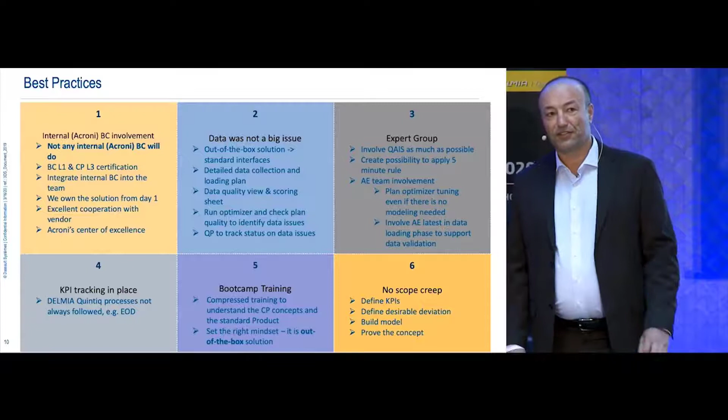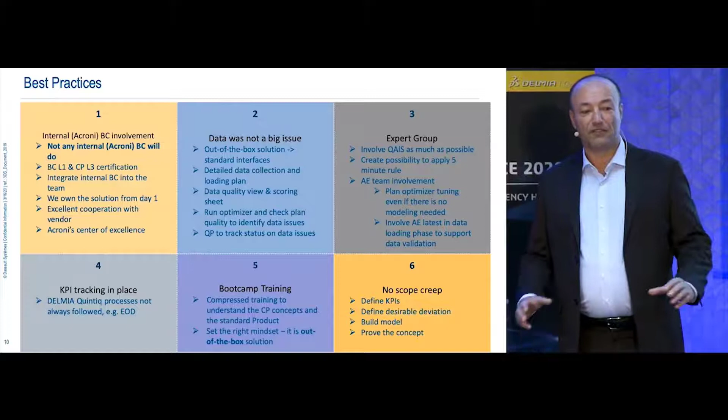Also, we tracked the success or quality of the nightly optimizer run using KPIs we set. This really helped us a lot to integrate the solution into our system between ERP and our MES systems. And just to mention bootcamp training: at the beginning of the project, we organized an internal bootcamp for the customer key users. We always kept in mind that we are dealing with a standard solution, so we were focused on solving all the problems in our planning puzzle using this standard functionality.

Lessons learned, or maybe the key message that I would like to give you throughout this presentation, is that the Quintiq company planner project was a success, and this was a role model for all the improvements that we've made in other IT project preparation, the approval process, and of course the implementation itself. Number one, valid also for the Quintiq company planner project, is that there should be a clear business customer. This is valid for every project.

So now in SIJ Group, on the total group level, we do not start any project. Any project cannot even qualify if there is not a clear understanding of who the business customer is, and that we have clearly set goals and targets of what needs to be achieved. So the confusion that was maybe a practice before is now totally eliminated. Of course, the main part of the project is the people that work on it. So the right people with the right role and the right responsibility on the project.